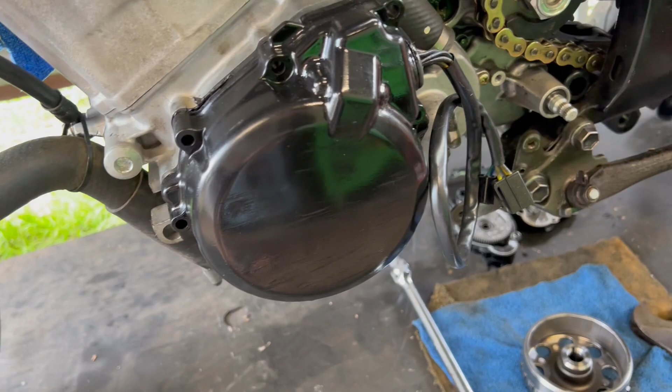Alright, so it's time to take the flywheel off. I already did a dry run. I removed the flywheel off the old engine. It came off a lot easier than I thought. Here's the bolt. So here's the tool to pull this flywheel off. And like I said, it came off easy, so I don't even think you need this.

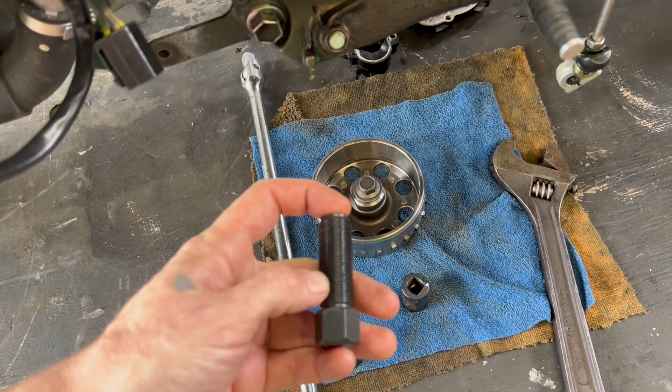You can just go to AutoZone or wherever and get an M20 by 1.5 drain plug for an oil pan, and that'll work just fine. It doesn't have to be this long. You can see those threads are real shallow, so you don't need a long ass puller, or a long ass push bolt, to get this off. So anyway, we'll go ahead and take this off now. So let me get you set up here.

So this is not the right tool, but it's what I got. So we'll see if it works. There's your bolt. Put a little grease on here. Just like that. So I thought that would be much more difficult, but it came off real easy. So we got it off.

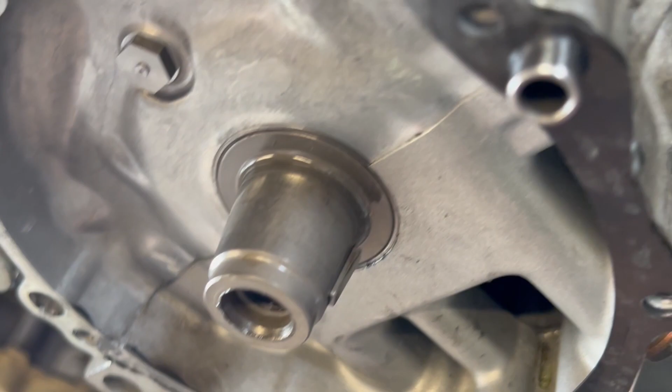Now you just want to inspect the shaft here. Look at your woodruff key. Make sure everything's good. You also want to clean this with brake cleaner or something like that. You want this completely dry without any oil or grease or anything like that. Same thing with the flywheel. You want to inspect it for cracks or any damage, and you want this taper in here to be nice and dry before you put it on,

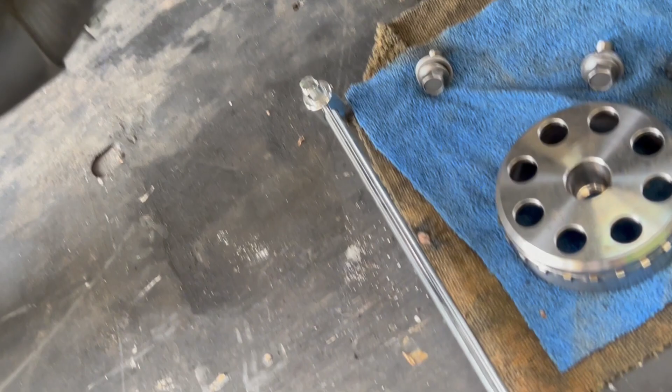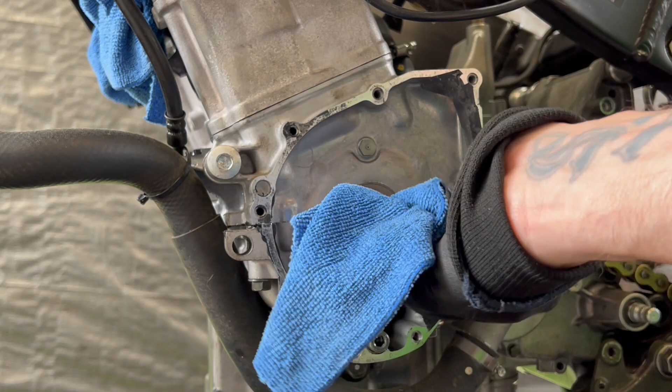because it's a taper fit, so it's relying on friction and this little keyway, so it needs to be dry. And then you want to also make sure you torque down the bolt to 89 foot-pounds. All right, that's it.

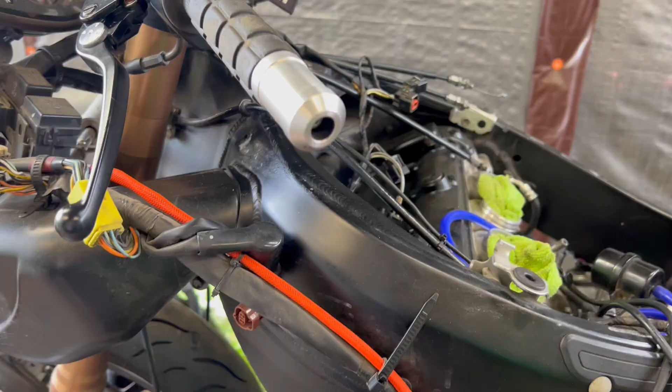So the stator that goes on there, the cover was all scratched up. I painted it, but obviously it still looks janky. The cover from the old engine is still good, it just needs to be painted. So I'm gonna paint this cover, and I'm gonna swap this over to here, and then I'll get that put on and that'll be finished. After that, then we're gonna be doing some electrical work. Yay!

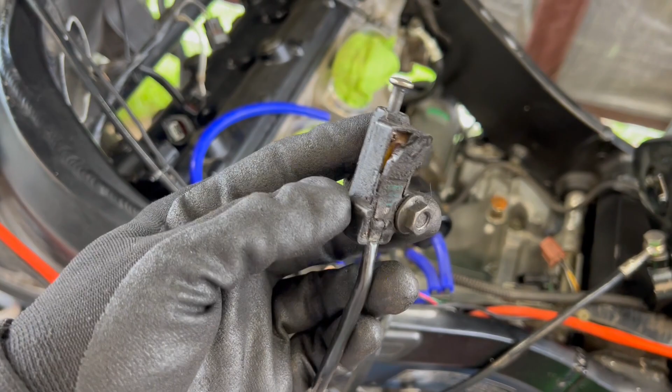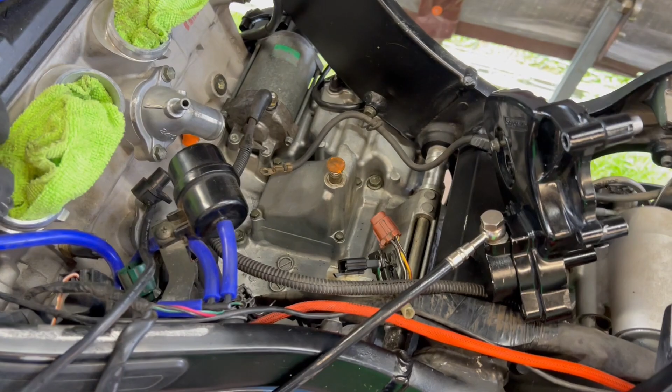So, let's see. The side stand switch needs to be cleaned up and fixed because it's coming apart. It still works, but I don't know. Maybe I'll use some epoxy or something back here. But yeah, that needs to be addressed. And then obviously the burnt up stator connector we're gonna fix.

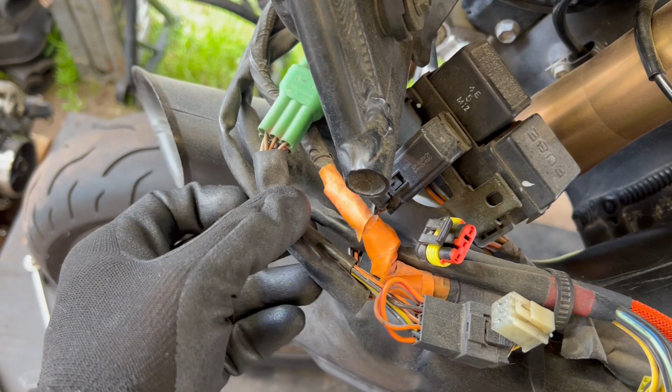And so when I originally bought the bike, they had a shift light mounted right here that lights up, you know, tells you when to shift, and it was tied into this circuit here. It had a little electronic module or something that was bolted right here. So I took all that off when I first got the bike. So I'll probably go in here and fix this the right way so it doesn't look retarded like this.

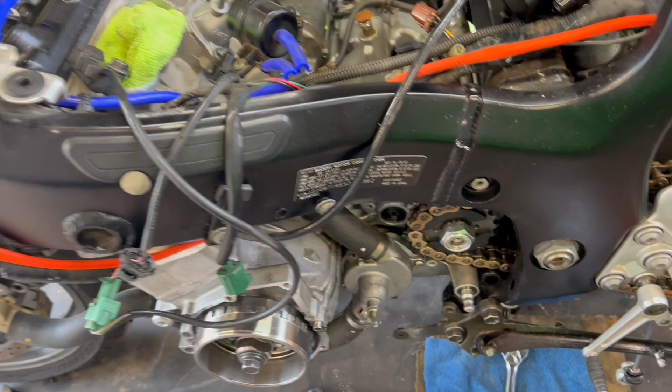And then after that, I'll torque this bolt and get that front sprocket put on. These sprockets and this chain need to be replaced eventually, but they're still good for now. So I'll get this put on, get the cover put on, and then we'll get to start putting the engine together, and hopefully we'll have the bike on the road soon. All right, we're gonna torque down the front sprocket to 107 foot-pounds.

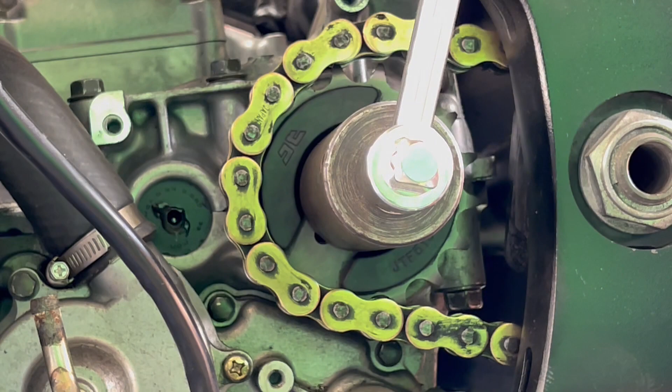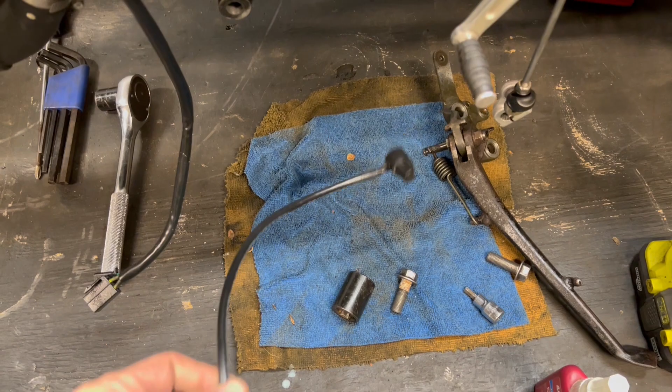I skipped ahead a little bit. I got the cover on. I just got to put this pickup sensor on there, but we're going to use this one. This is a new one. And then fill up the clutch reservoir with fluid and bleed the air out. And right now I'm focusing on the side stand switch. So we're gonna clean this up and fix it.

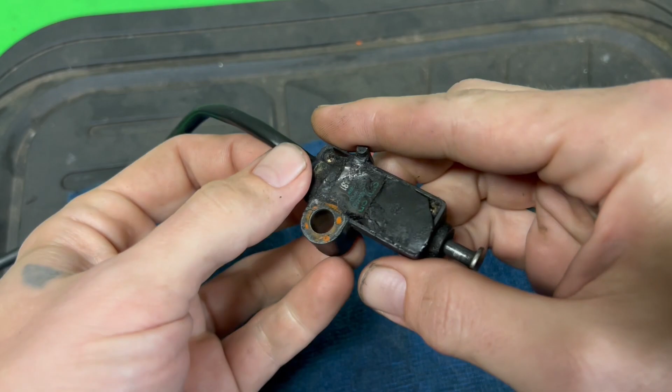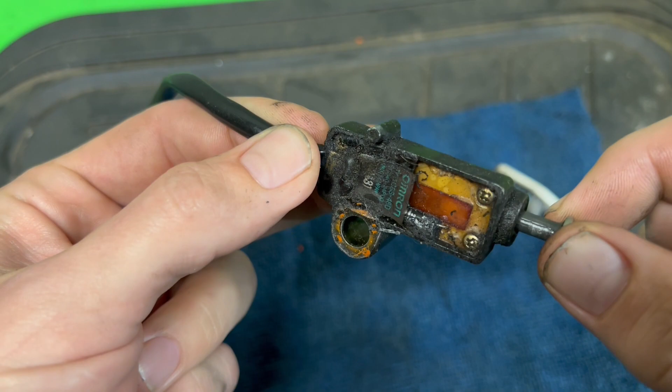So you can see this is falling apart already. So what I'm gonna do, I'm just gonna clean it with some WD-40 and my wife's toothbrush. My toothbrush. An old toothbrush. And then I think I'm going to fill this cavity here with some 2-part epoxy.

All right, so I got all that stuff out. I had to use a pick to kind of dig it out. So now I'm gonna spray it with some solvent to get all the oil off and mix up some epoxy.

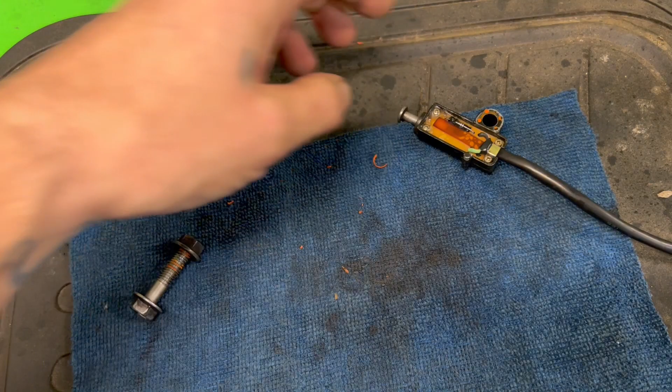Oh yeah, smell that? I love the way this stuff smells. I don't know why.

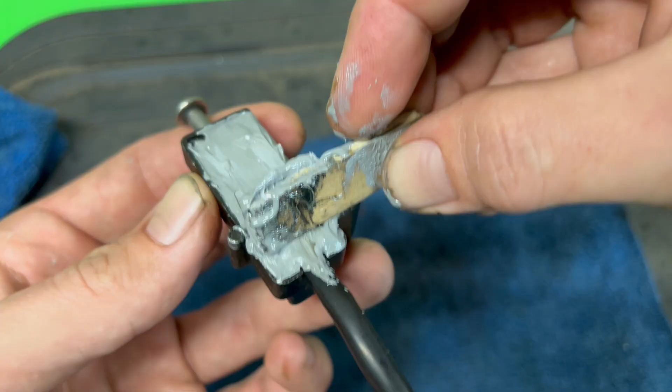Try to get it as even as I can. Oh, sorry. Great camera work, huh?

I think that's good. I think if I keep messing with it, it's just gonna screw it up. But that should be good right there. So I'll just wait for this to dry.

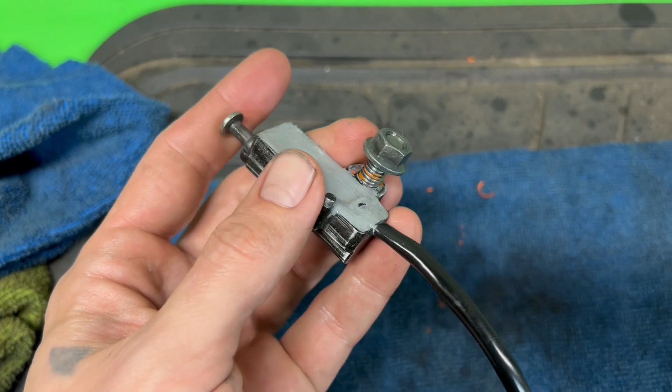Alright, so it's finished drying. I sanded this down. I'll go ahead and spray some paint on it, and it'll be good as new. Alright, there we go. Not bad, huh? I think that'll work just fine.

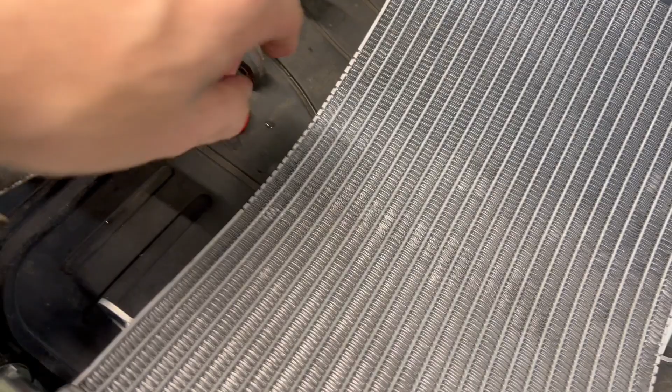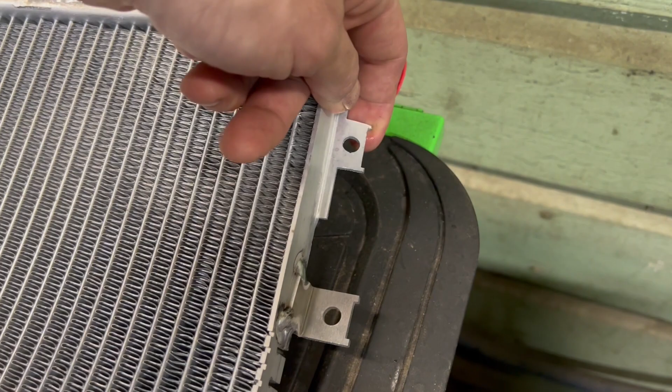Alright, so the new radiator came in. There it is. I paid $80 from eBay. So the welds look pretty good. Not bad. These tabs down here were bent. This one's bent too, but that's okay. I'll straighten them out. You can see it's a big difference from the old one. So I'll get all the hardware from this one transferred to that.

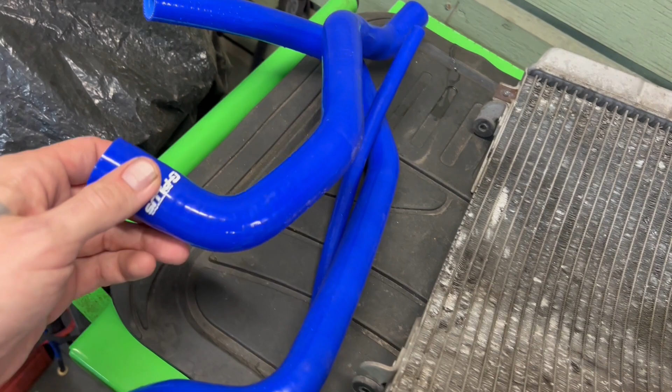Here's the silicone hoses. I got these on eBay as well. I paid like $35. So yeah, and they're blue. I'm gonna jazz it up a little bit with some color. If you don't like it, oh well, don't watch.

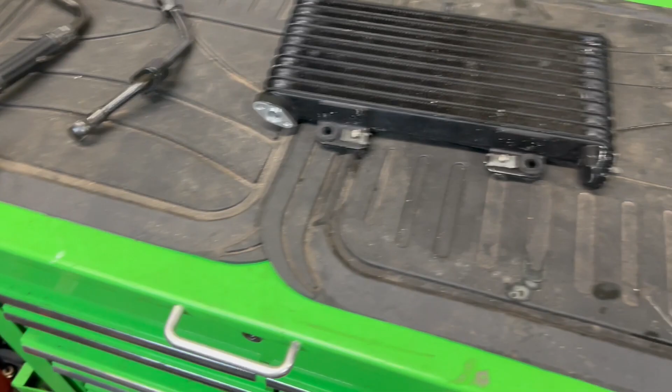So that's the radiator. Now, I had a comment about the oil cooler, and let me show you that. So I had a comment about the oil cooler, and the person was concerned, and he said basically I need to replace this because shavings and metal could have made their way into the cooler. And that's a valid concern. So I looked on eBay. I couldn't find any brand new. All I could find were used ones. And I think there was like one brand new one, but you had to order it, and it was shipped from China.

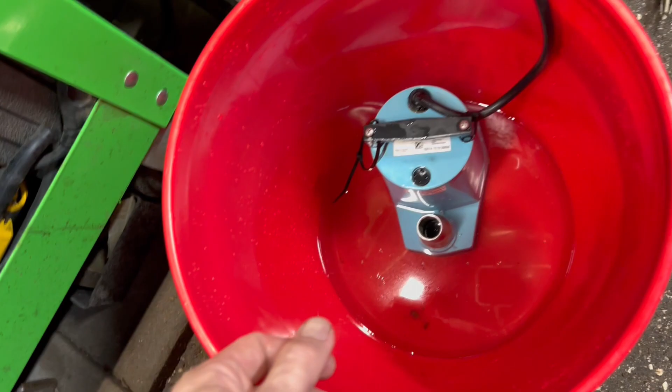So what I did was I took some of this and I put it in a bucket of water with this little giant pump. This thing puts out some pretty good pressure. So I basically used some Southern engineering, and I rigged this pump up to the cooler, and I flushed it out with the soapy water. I just left it there for like an hour, just flushing out. And I did both ways. So I flushed it and then I back flushed it.

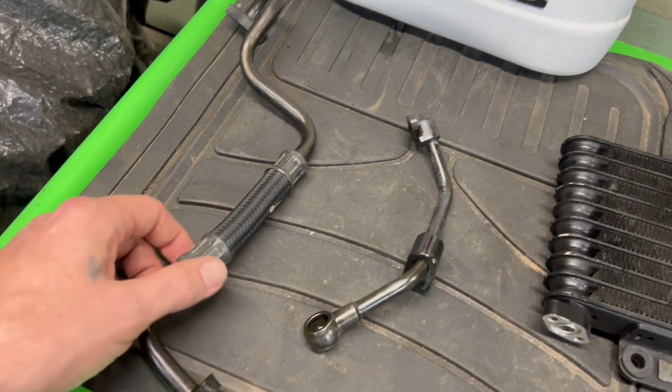And I did the same thing with the hoses, the hard lines. And then once I was finished, I sprayed some WD-40 and everything and blew them out with compressed air. So I'm confident that this cooler is cleaned out, and I'm just gonna reuse it. All right.

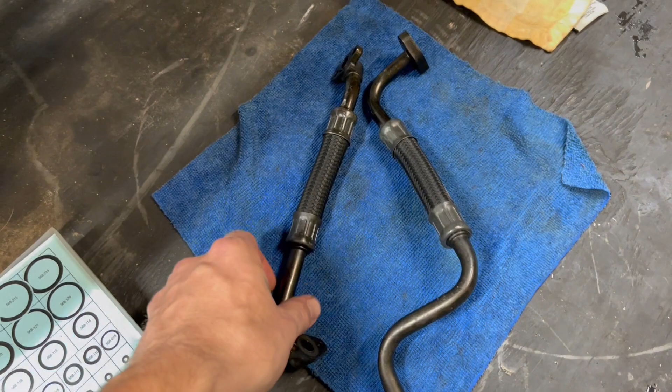All right, boys. So I'm ready to put the headers on. So I'm gonna get these hard lines put on. I will be replacing the O-rings. So I'm gonna get those on, get the filter on, and then I should be ready for the headers. All right, I got the hard lines on, got the bracket on. Of course, I bought the wrong filter. This is not the correct filter, but that's all right. We can still put the headers on.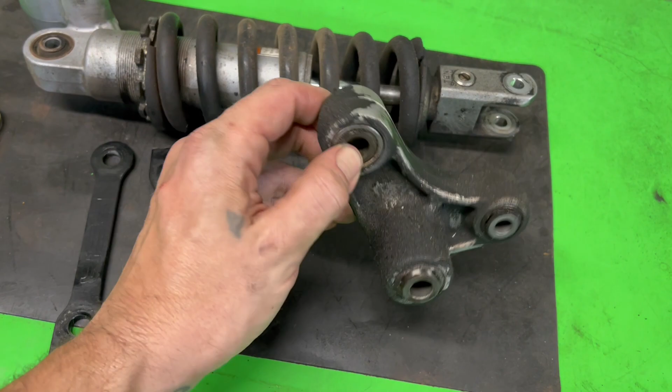Before I put the headers on, I'll remove the rear shock and the linkage. So I'm gonna clean this up and clean the bearings and re-grease everything. And then these were the dog bones that were on there. I'm gonna put the stock dog bones back on. All right, there we go. We got everything cleaned up. There's the shock.

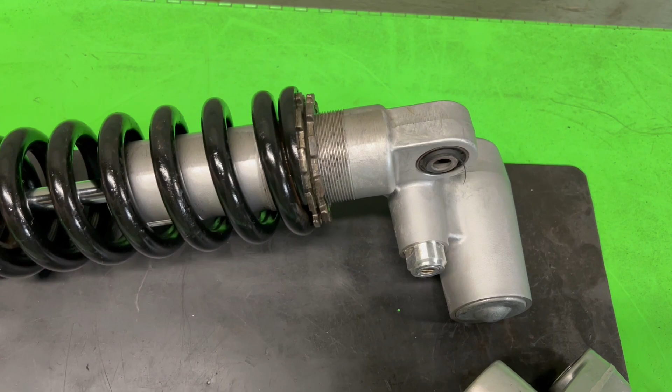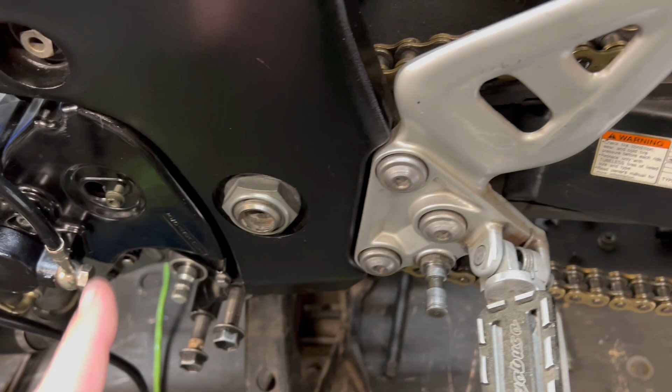So I'm gonna pack these bearings with just regular lithium grease, but I'm gonna pack them as much as I can. And then I cleaned everything in here too, the swing arm and whatnot, and cleaned all the lugs and stuff down here. So I originally planned on taking the swing arm off and doing the same thing with the bearings for the swing arm, but I need to get the bike on the road, so I'm not going to worry about that right now. When I change the sprockets and the chain, then I'll do the swing arm bearings. There we go. It's all clean, greased, and hooked up.

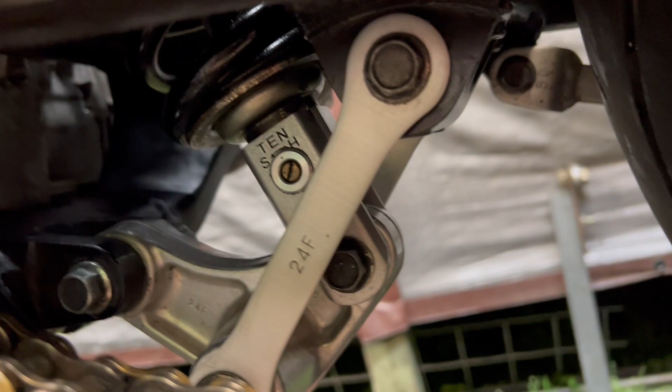All right, I went back to the auto store and got the right filter. It's a Wix 51359. Also the stator cover, I went ahead and painted, so that's ready. That's going to be a lot better than this one with scratches all on it. Here's the headers. Sorry, my brain stopped working again.

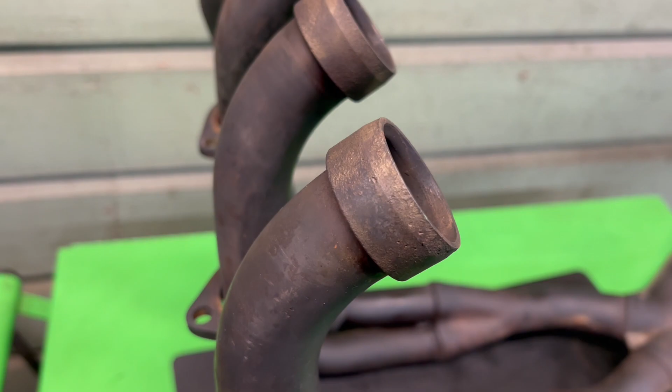So here's the headers. I'm going to clean these up. So you can see I cleaned this side up a little bit. That's what it looked like before. And then of course I'm going to clean up the end of the headers right here that actually engage into the engine. Now, I'm not going to go crazy with this and actually clean these and take all this oxidation off.

I know some people like to use, I believe it's sodium hydroxide, which is basically lye. They use it in like toilet cleaner or drain cleaner. So people like to use that to actually remove this layer of oxidation and make the exhaust tubing shiny again. However, these headers, you don't really see these unless you're looking directly at the front of the bike. And the grade of stainless, I believe these are stainless. Hold on.

Get a magnet. Okay, well, they're pretty magnetic. So maybe they're not stainless, or they're a lower grade of stainless. So removing this layer of oxidation really doesn't do you a whole lot of good, because they're just going to oxidize again.

But it really doesn't do you any good to clean all this and get them all shiny. So I'll show you, because these aren't meant to be seen really, so it doesn't matter. But let me show you on this bike. So this is a Yamaha FZ1 and it's a naked bike. And you can see the headers are nice and shiny. So they use a better grade of stainless because this is a naked bike.

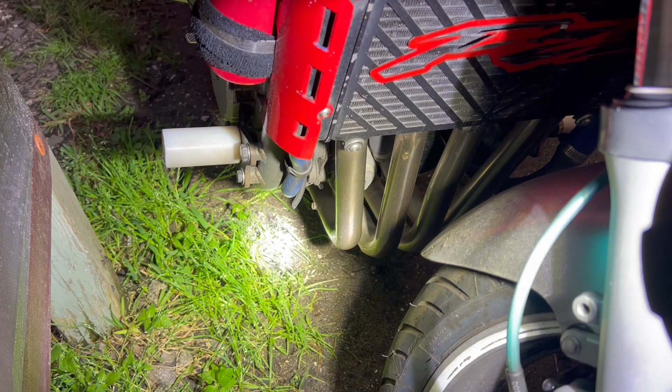You can see everything. You can see the engine, you can see the headers. So they're meant to be seen. So you want them to stay looking nice. I've never cleaned these, so that's why they're still shiny. It's just a different grade of stainless. So that's why I say it's not really worth it to clean these. Just leave them like they are. They're just fine. If you want headers that are going to be super shiny, then you need to get aftermarket headers.

All right, got the filter on there. Now, when I installed the engine, I put a little bit of oil in it, so I'm going to drain that oil out. And then once I hook up the oil cooler, I'll fill it up.

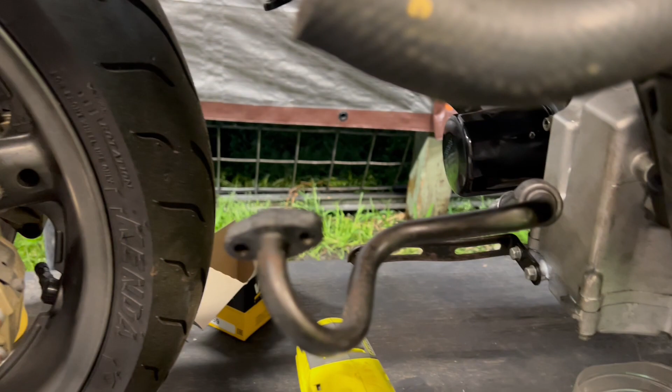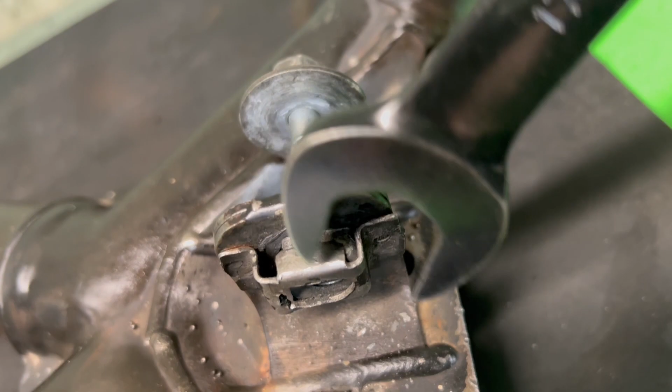All right, I got the headers cleaned up. And if you remember from a previous video, I had hell getting this bolt out. And the reason is the nut that's in here is only held in place by these tabs, and these tabs were bent out, so that square nut was just spinning in place, so I couldn't get this bolt out. So what I did was I took a hammer and a punch and I bent these tabs back down, and I got it to where I can get a 17 millimeter wrench on here, and hopefully that'll prevent those tabs from bending outwards.

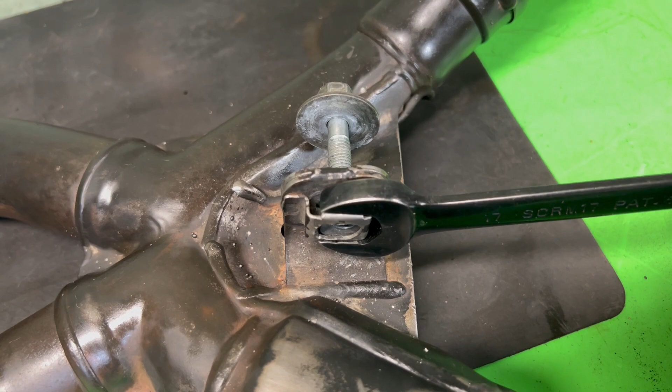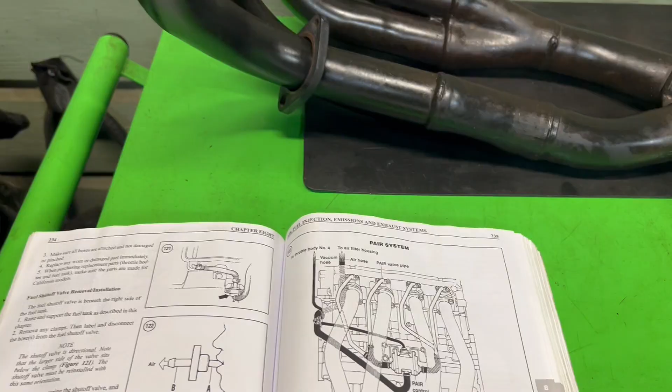Also, I got these block off plates installed, and in a previous video I said that this was the EGR system, the exhaust gas recirculating system. That's incorrect. This is for the PAIR system, pulsed air injection system. So what it does, you can see right here, here's the headers, and then that's where the PAIR system connects.

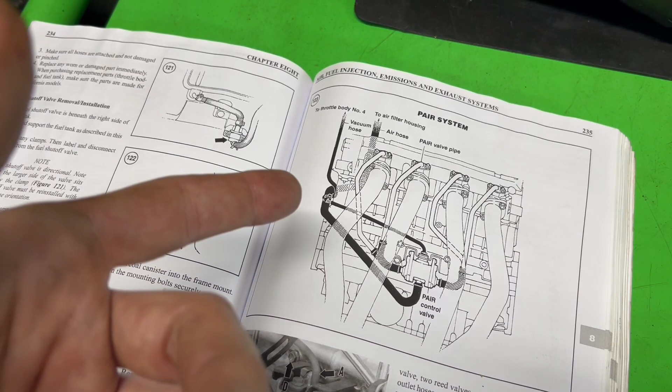It basically injects fresh air into the exhaust system, the exhaust gas. It's for emissions. We don't need that down here in Texas, so that's why I was saying I deleted that system. So I just wanted to make that correction. It's not EGR, it's a PAIR system.

All right. Starting to look like a bike now, huh? So what I did was I just set these in place, and I just hand tighten these bolts. Make sure that when you install these bolts, you do it by hand. Don't just run them in with a power tool, because you can easily cross thread those aluminum threads. But I just got them set in here, and then I use the scissor jack to kind of lift this end up. You don't need this, but it just made it easier for me.

And then I got that back lug in. You see back there? But everything's loose right now. So I'm not gonna connect the... focus, damn it. What the hell? I don't want to connect the actual exhaust yet.

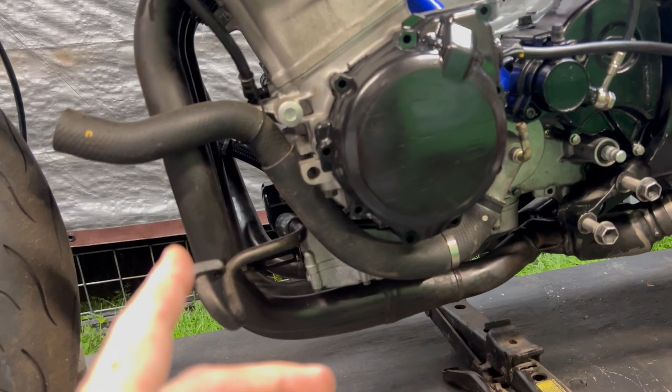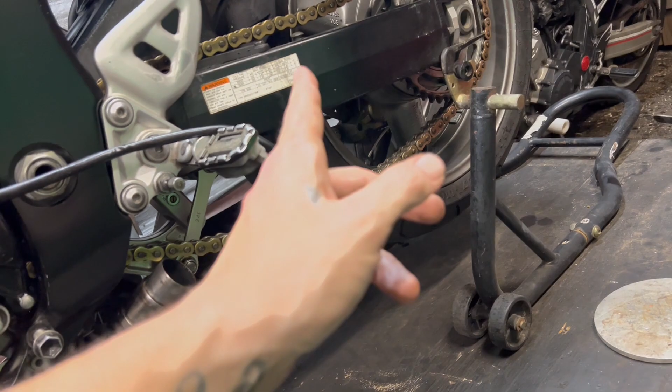But when you start tightening these bolts, you want to start from the headers and work your way back. Okay, so you would tighten these and make sure that you torque them. Use a torque wrench. You want to start here, tighten those, and then you tighten that, and then you go to your final exhaust system. So basically, when you're tightening everything, you start from the front and you work your way to the back.

So I got the stator cover on. I got one of the hoses installed. And now it is time to do the electrical work. Now, I removed the air intakes.

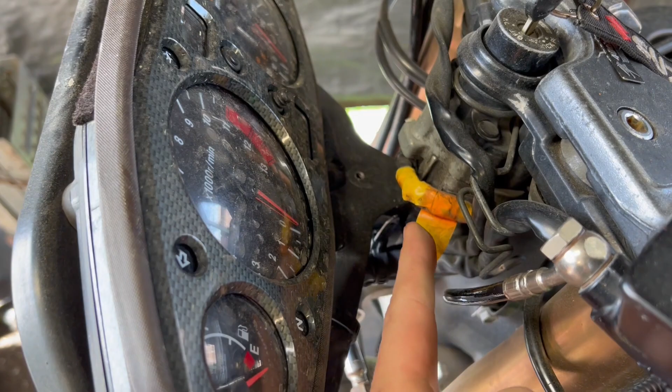I removed both intakes just to get them out of my way, because I'm going to be working on this right here, this back here, and of course the burnt up connector. So I'm not gonna lie to you, I've been dreading this part of it because I hate doing electrical work, but it needs to be done. So I think we're gonna tackle this first. I'm also going to disconnect all this right here just to get it out of my way.

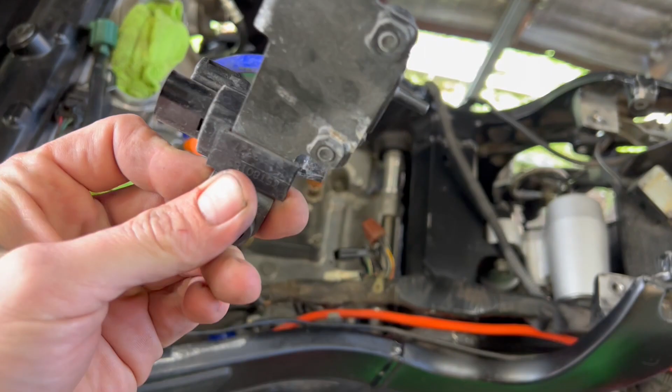Plus, I think there's some new thingamajigs that were included with the engine that I bought. So I'm gonna replace anything that I can with new stuff. All right, there we go. Got this out. So this will give me more room to work now that this is loose. Okay, so I need to work right here, and this part of the harness was actually pinned into the frame right there. So I used this trim tool and just stuck it in there and pried it up.

And now you can see these wires. These wires got pretty damn hot. So I might actually have to, let's see. I'm trying not to cut into this harness if I don't have to. So let me take some of the sheathing off right here, and then we'll see what we got. All right, so I've got the circuit isolated, and you can see these wires are actually burnt a pretty good ways back here.

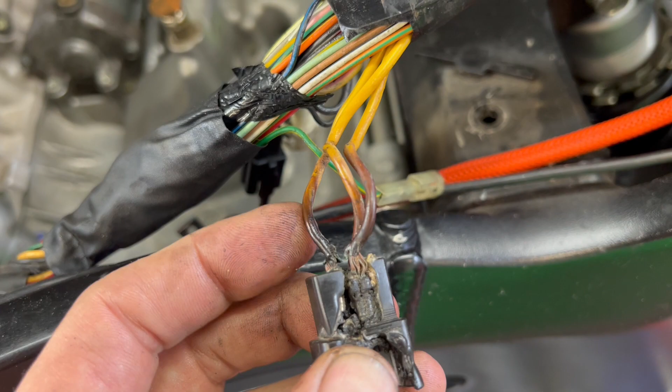So I originally thought maybe I could just cut the wires here and add new terminals to them, but I don't know, man. So not only are they burnt, but they're real stiff. Where the dark area is, that wire is real stiff. Like it doesn't have any flex to it. So I'm gonna have to cut it back here where the wire's still good, and then I don't know. Let me figure out what I'm gonna do.

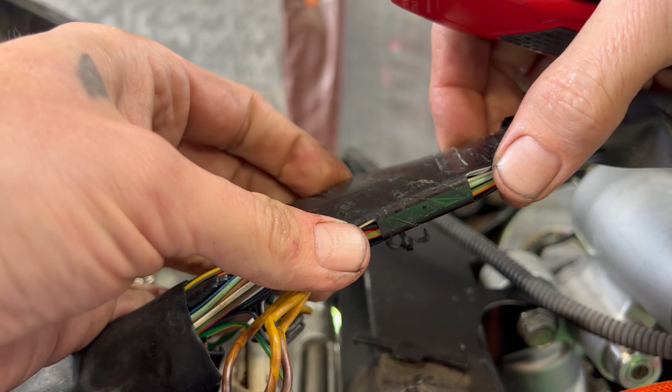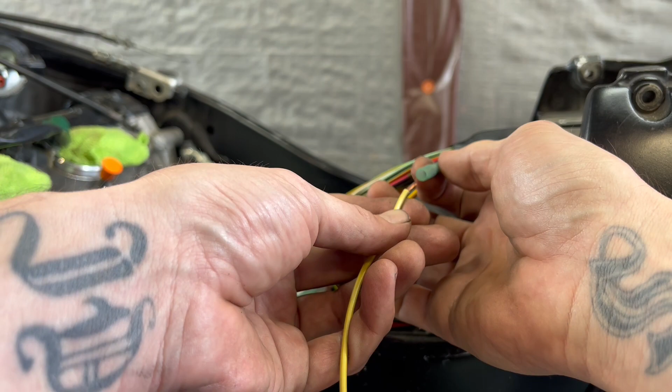Oh yeah, there we go. Alright, so now we have good access to these wires. So I've got some 600 volt 14 gauge wire. This is what I'm going to use. Alright, there we go. It's a little bulky, but that's okay, it'll work. Now our extensions. Okay. I think that'll work just fine. There we go. And might as well put some heat shrink on there too, huh? Why not?

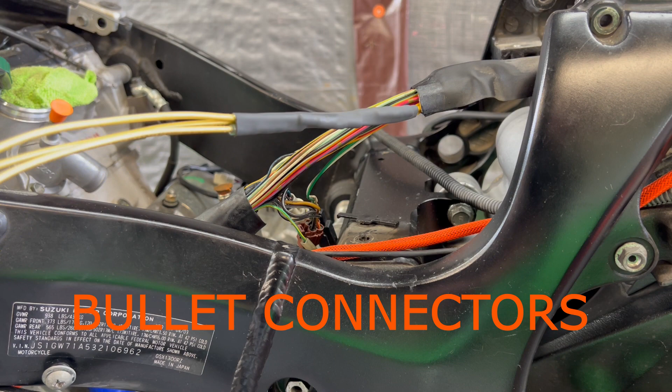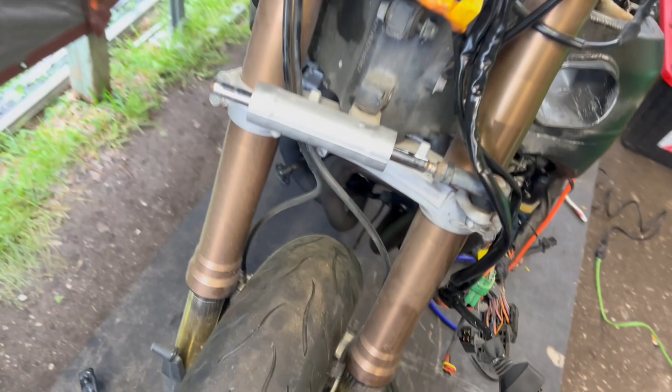D-U-N, done. All right, let's move on to the bullet connectors. All right, so I went ahead and I removed the front fairing stay. I took this off so I'd have better access to this. I don't remember what was going on with this, but it might have had something to do with the shift light that the previous owner had installed. So I'm gonna fix this.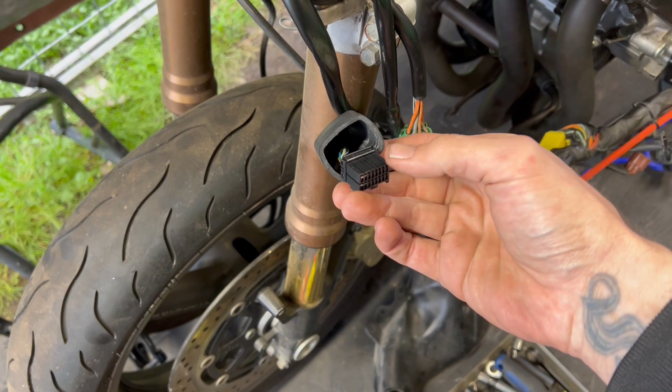While I have all this apart, I'm gonna clean up all these wires, this harness sleeves, I guess you could call it. I'm gonna clean all that up. I'm cleaning up all these connectors. I'm gonna take apart these connectors and clean them up really well. Oh yeah, this too. I gotta fix this. But all this is gonna get cleaned up. I'm gonna clean it really well.

It's a cat. There's a cat right there. Cat, what are you doing? What are you doing, cat?

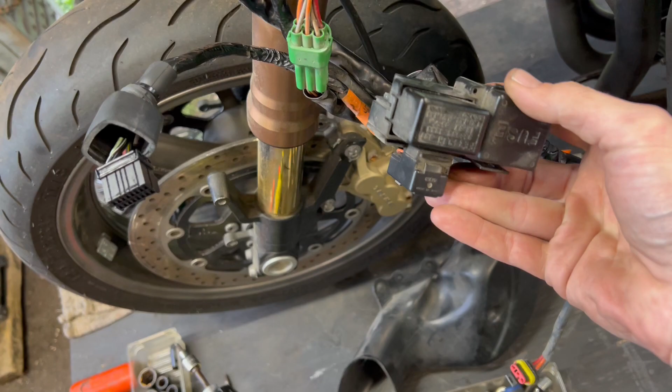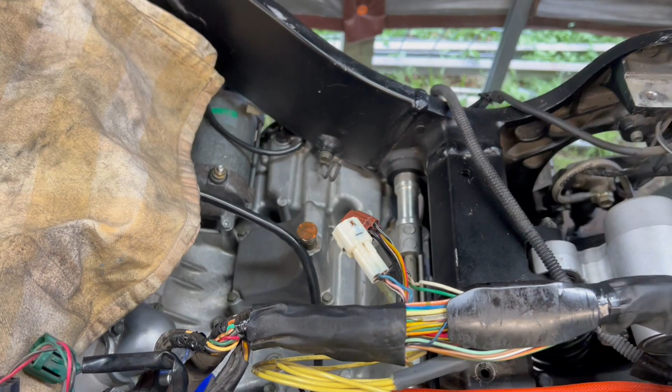Anyway. Yeah, I'm gonna clean. Here's the fuse box. So, like I said, I'm gonna clean all this up. Plus, I have better access to this area right here. So, before I actually do the terminals, I'm gonna clean all this stuff up and fix those things, and then tape it all up, and then I will get back to you after that's finished. Oh, and just to let you know, the way I clean things like this is just regular old WD-40, my wife's toothbrush, and some compressed air.

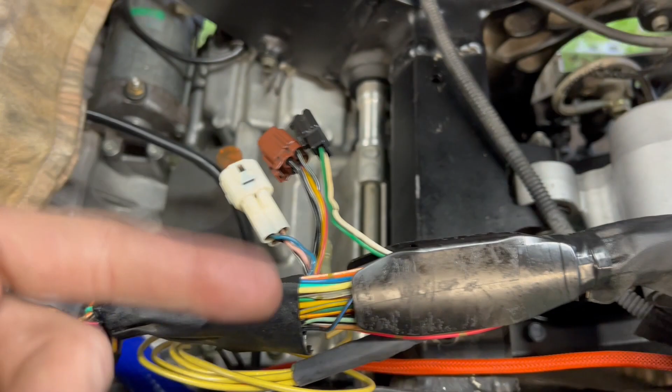So these connections here, even when the harness is wrapped up, these connections just hang out like this. There's no protection on the wires. Here's another one hanging out right here. So they all just kind of hang off the harness like that. So I'm gonna add some protection to the wires, like I showed you before. I'm going to disengage the wires from the actual terminal, and then maybe I'll just put some heat shrink, or I might have some actual rubber sleeving for this. I don't know yet. I'll figure something out, but that way it looks a little better. You don't just have a bunch of random wires hanging off the side of the harness.

There we go. Something like that. Takes a little time, but I think it's worth it. Just kind of cleans it all up and makes it look nice. Makes it look professional. I don't know, I like doing it, so.

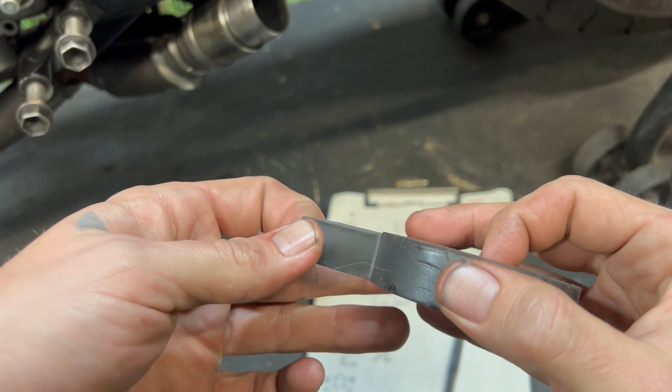All right, so I'm finished with this section here, so I'm gonna go ahead and tape everything up, and I'll show you what tape I use. All right, so this is splicing tape, and it's not really sticky. It's a little sticky, but it stretches a lot, like that.

And so this is for, like, I'm not an electrician, but as far as I know, this is for splicing like high voltage applications. But I'll basically wrap the harness, I'll wrap everything with this, just one layer, and then I'll go over the top of that with some good quality electrical tape.

Okay, here's what it looks like with the splicing tape on there. And like I said, after this is installed, then you go back over it with some electrical tape. It does take a little time to do this, but I think it's worth it. So I'm going to continue on down the line. Here's the wires for the stator. I still need to connect the terminal to it, but I'm gonna work my way down and basically do the same thing I did here, right on down the line.

And you know, some of these connections like this, I'll probably sleeve this. This one I'm gonna leave alone. I'm not about to unplug all this stuff. Excuse me. But yeah, I'll just go down the line. I'll clean all this up, clean all these terminals, work my way down the line, fix this like I was telling you, clean all this, fix this, and then I will get back to you once it's finished.

Whew, that took a long time. All right, so I'm finally finished. You can see I went ahead and sleeved all of the exposed wires. I cleaned everything up. Still need to do this. Don't worry, we're gonna get to it. I wrapped these right here. So I'm pretty much done with the harness.

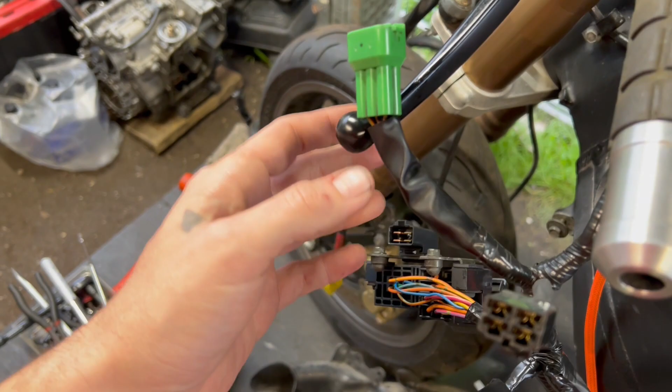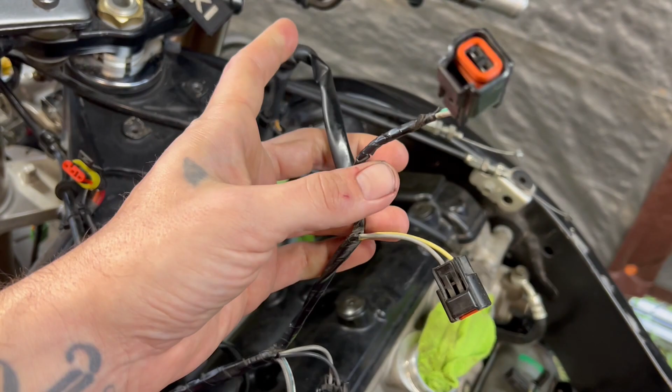Now, I was over here inspecting the wires for the fuel injectors, and I noticed that the tape that they have on there is kind of falling apart. It's real stiff. It's just old because it's gone through so many heat cycles being on top of the engine like that. So I'm gonna go ahead and sleeve these two, because, I mean, this is for your fuel injection, so.

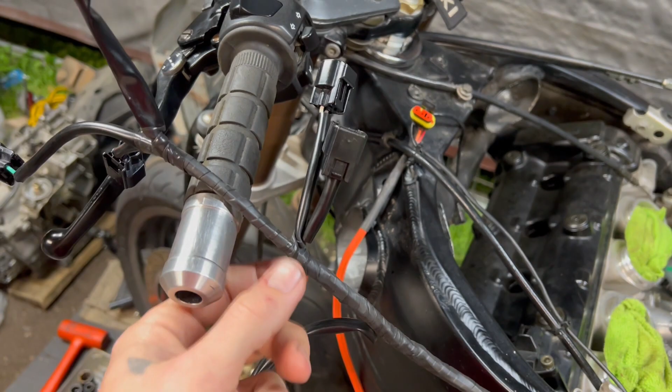I'm gonna clean everything up. This one has a sleeve on it already. I don't know why they didn't do these, but anyway, I'm gonna go ahead and clean all this up and do the same thing. All right, so got all that fixed. This is the splicing tape right here. I haven't wrapped it with electrical tape yet. And it looks a lot better, right?

I don't know if this is a waste of time to do this, but I feel like this kind of upgrades the bike a little bit, you know? I think it's worth it. Put in a little extra time and do it like this while you have easy access to everything. Why not, right?

Okay, so here are the leads for the stator, and then here's the connector coming from the stator. I already took the terminal off, and after looking at this, I wanted to use actual terminal connectors. So here's the connectors, right? I wanted to use these. The thing is, that's pretty bulky, right? I mean, that's going to be sitting over here like this somewhere.

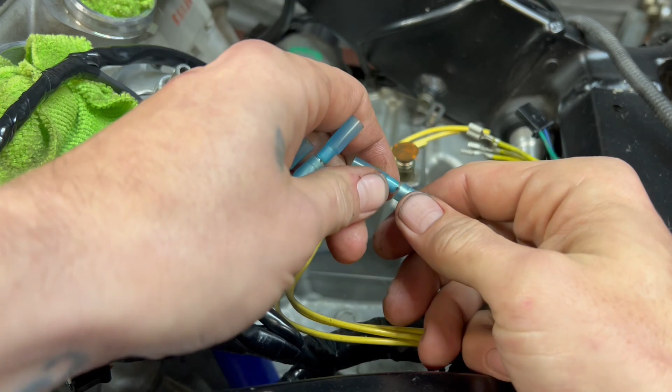So I think a better idea would be to just use some bullet connectors like this, you know. So it'll be 3 bullet connectors, and that's going to be a lot lower profile than that other terminal connector. So I'm gonna go this route.

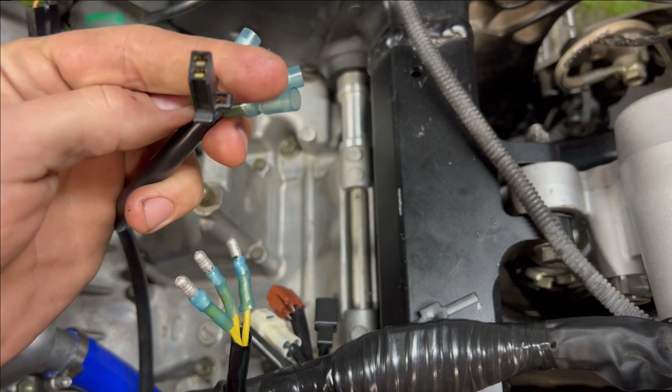All right, there we go. Got our bullet connectors hooked up. This is also going to make it a lot easier if I ever have to replace the stator. I can just simply attach new bullet connectors instead of having to do a whole new terminal. So like I said, I still got this terminal. This one's going to stay. That hooks up right here. And then these 3 hook up here.

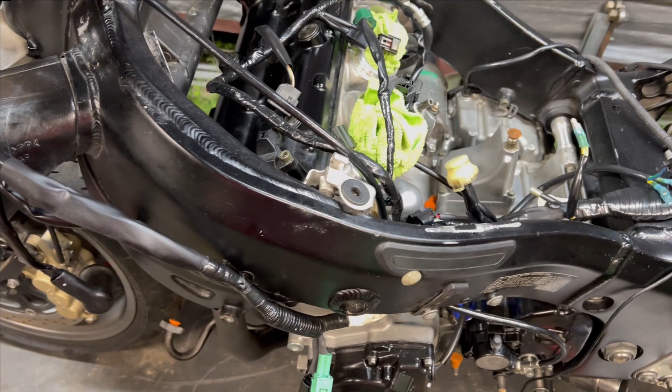So that's finally finished. Now I can start putting everything back together and get the throttle bodies on. And then I think that's it, huh? We got the headers. Yeah, so we'll hook up the throttle bodies, hook up all the electricals and whatnot, get the air box on there, cooler, radiator, and then we should be able to fire this thing up, see if it runs.